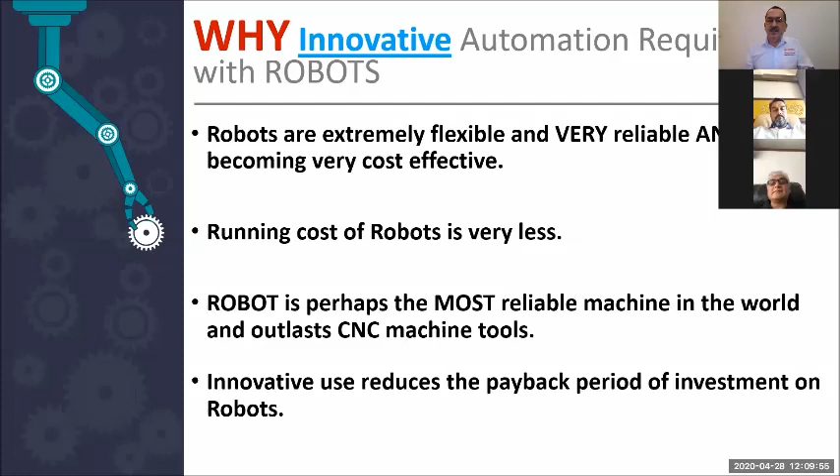The most important lesson, and what we are going to explain today, is that if you use robots innovatively, the payback period is very, very small. That is going to be the focus here. We are not going to talk about robots as such because I'm not an expert in robots - I am an expert in the innovative use of robots, so that the benefits are tremendous and you have a payback period for the project of less than 2 years, which is our goal.

Now, why are robots required for automation? Yesterday we had a very popular webinar where we had more than 400 unique participants, and we explained automation without robots. So why do we need robots?

First of all, non-robotic automation, which is reliable and not jugaad, is only possible for small jobs which through gravity or vibrations can enter the enclosure of the machine, where grippers mounted on the slide of the machine are able to load and unload. So this is the scope. You must have small round parts, hex parts, or small shafts. That is the limitation.

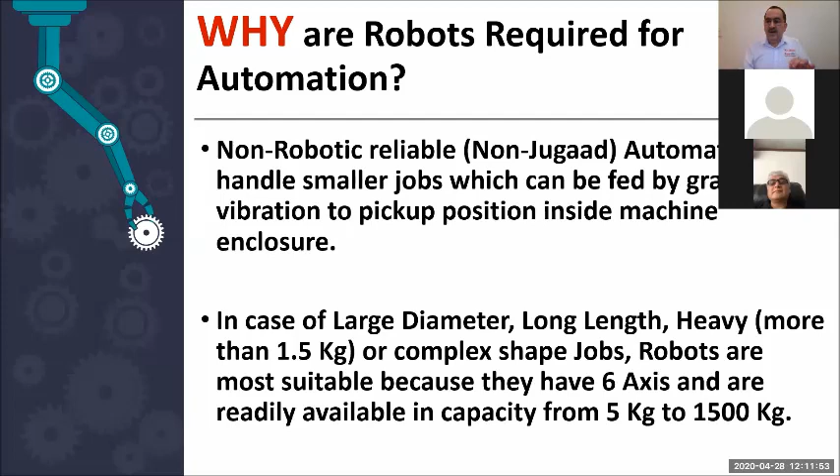Now if your job diameter is beyond a certain point, for example we have supplied automated cells with robots for jobs up to 600 dia, up to 90 kg weight, for flywheels, for very long shafts, for odd shaped jobs. When you have these kinds of challenges, the robot is the best option because it is very agile. It has 6 axes, so you can move it in a very innovative manner, and it is available off the shelf from capacities as low as 5 kg to 1500 kg. There are even bigger robots, but from 5 kilo to 1500 kilo you can cover almost every job you can think of. So this is why robots are necessary.

Now, the core theme of this webinar: how are robots used innovatively? How do we recommend the use of robots in an innovative manner?

There are 4 ways. The first innovation is called placement or positioning, that you can place the robot in a very innovative manner so that it can do a lot of things and give high value. The second innovation is extending the range of the robot by using a 7th axis, which is a track at the bottom on which the robot moves.

Please note that when you see the specifications of any robot, there are two things: one is called payload, and the other is called range. So for example, if payload is 12 kg, for a 12 kg standard robot of a standard make, let's say Fanuc, you will have a certain range, for example 1300 mm. Now this becomes a limitation, that within this circle only the robot can load, unload, or do any value addition.

But when you add a track to it, either it can be a ground mounted track or a pillar mounted vertical track with the robot hanging upside down, you extend the range of the robot so it can move far and wide. That's the second innovation, which we'll talk about and show today.

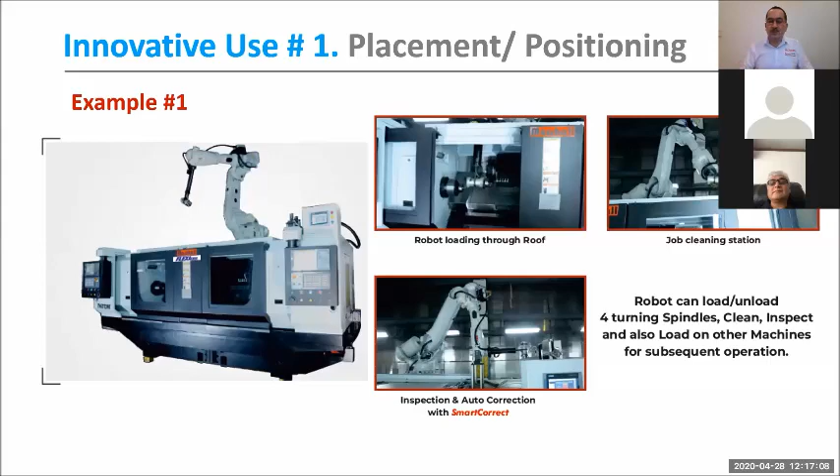So here's the video.

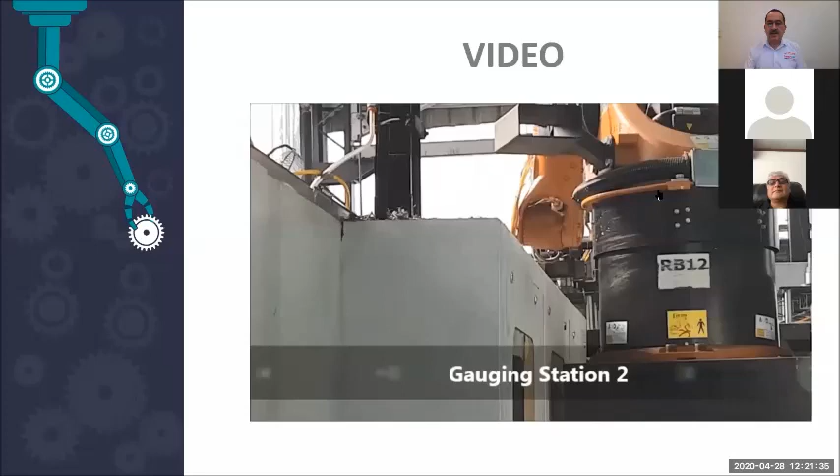As you can see, the robot is taking care of 4 spindles, loading and unloading through the roof. The actual speed is more, this has been reduced so that things are very clear to you. 3 gauging stations are on the roof, and the raw material comes up through an inclined in-feed system, as you can see right in front here. This is from where the raw material is picked up. So this was another example of innovative use of robots through placement or positioning of the robot.

Now, this third example is where we have done a lot of things with the robot, the machine, and other equipment. If you see on the left side, this orange colored thing is a laser marking station. The customer had a mandatory requirement of traceability from his foreign buyer, so each part after measurement had to be laser marked. On the right hand side, you see this machine, a very beautiful measuring system from Renishaw called Equator. This is used where a lot of things need to be measured, which a gauging station cannot do.

This is an option in certain cases. Now what we've done here is, because 2 spindles were producing the part, operation 10 and 20, and the customer also wanted a clean layout with minimum, no cage and all that, so we mounted the robot on the front of the machine using a track. The track enables the robot to cover a long, big area.

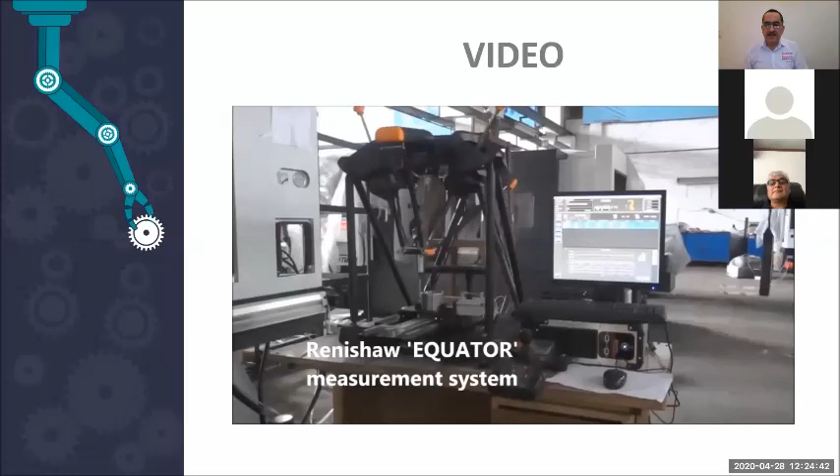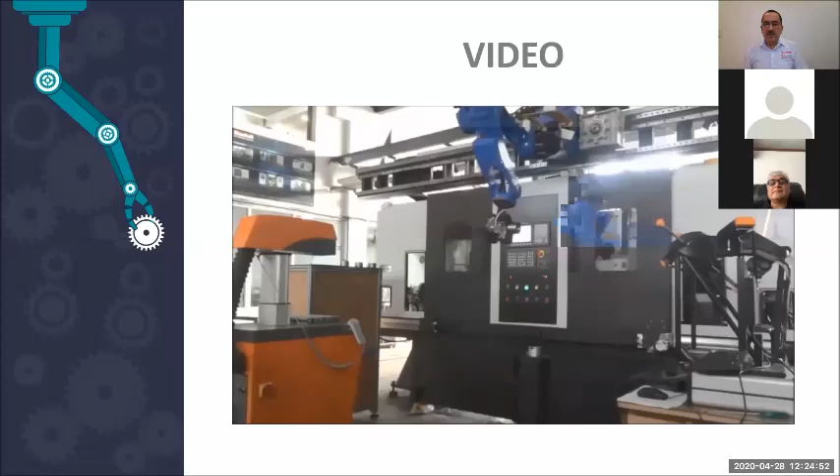So after measurement is done, a robot takes the job to the laser marking station, and within 2 seconds the job is marked, and then it is put on the outfeed conveyor. So again, this is an example of innovative use of a robot with the help of placement.

Now, before I go to the next innovation, which is using a 7th axis or a track, I would like to ask Mr. Paras Doshi. Mr. Doshi, I'm trying to unmute him. Mr. Doshi, will you unmute yourself? Yeah, I'm just doing that.

Mr. Doshi, you have been one of the early adopters of robot-based automation. I remember you gave us the first 2 orders for 2 lines in early part of 2013, and now it has been 7 years. So my question to you specifically is, has your confidence now with the evolution of technology and the addition of new things in robot-based automation increased in these 7 years?

Oh, very much. It is necessary today. Today, that is the correct way to go forward. And the way you've been explaining it in this webinar is very, very clear, very good. The robot is very flexible, and you have to use the robot for as many things as possible because you can do it. The idea of using the robot is not just to do operation 10 and operation 20 on a CNC machine, but to do various operations for which you require operators. So you have explained it very well that a robot can do many things, it can place, and it can work exactly the way you have programmed it.

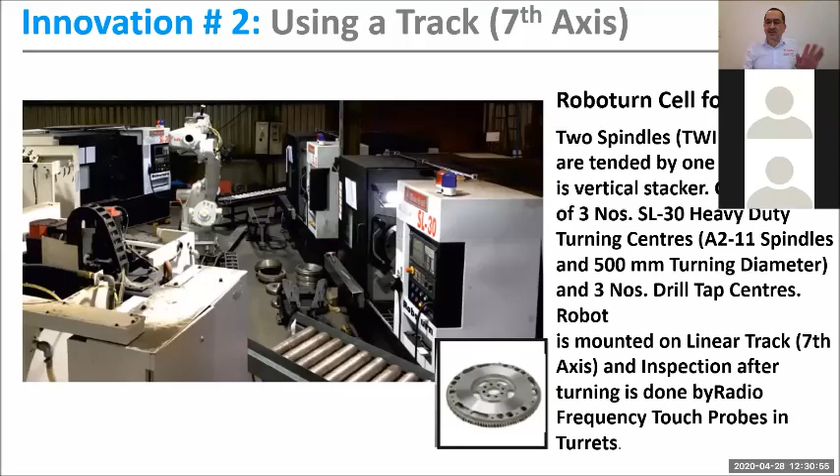This video, friends, is not very good because it was shot with a handheld phone on site, but I still want to show it to you so that you have an idea how this cell is working.

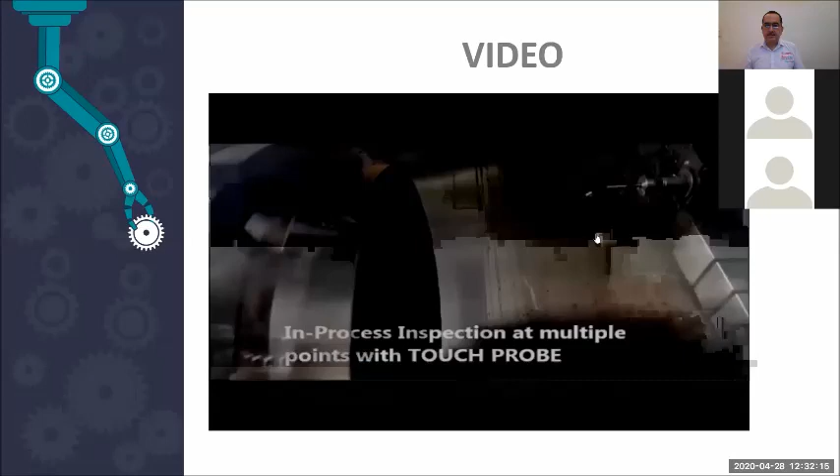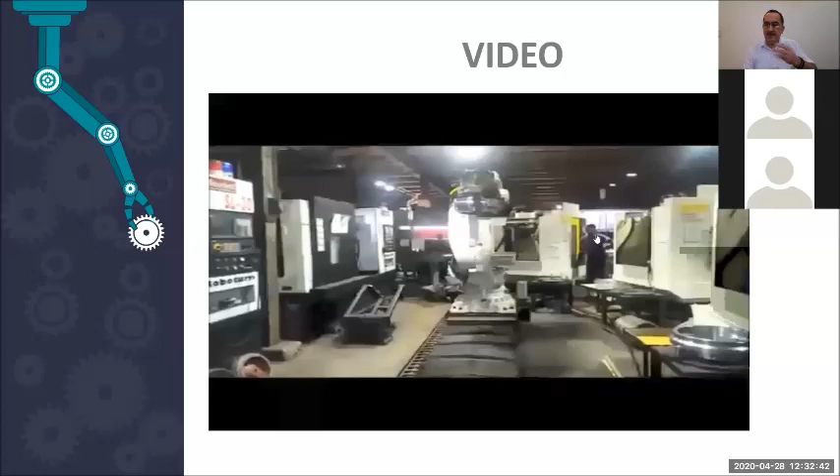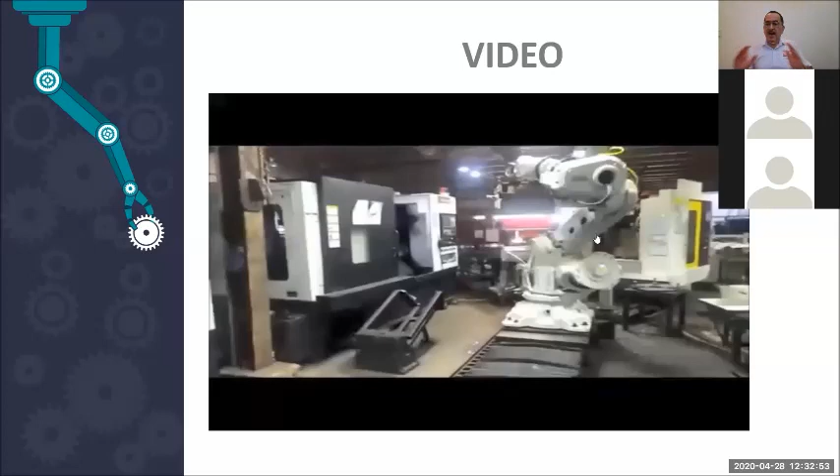Here, the robot is now taking it to the VMCs. There are 2 VMCs which do operation 30, which is the drilling on one side, drilling and tapping. And then there is one VMC which does operation 40, which is the other side. So basically the whole line has been balanced in such a manner that there is no wastage of time - 6 machines covering a large area are tended by 1 robot.

Sorry once again for this video - it's shaky, but I still wanted to show it so that the concept of how so many machines can be taken care of by the robot is clear.

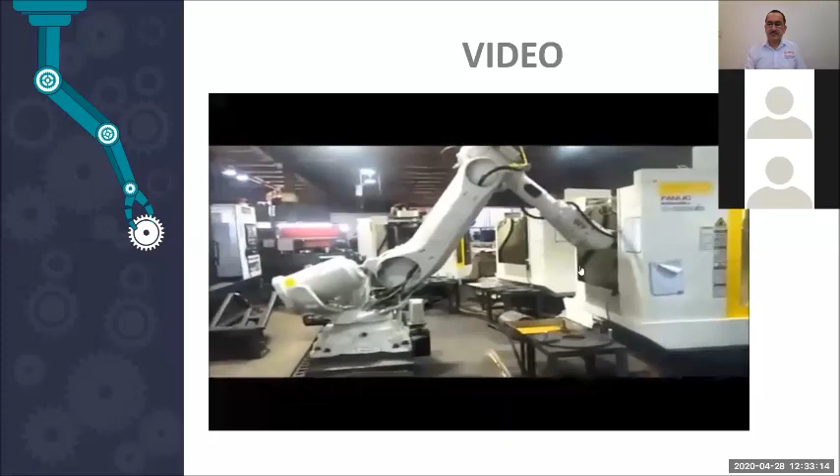So this was the first example of using a 7th axis to extend the functionality of the robot, by extending its reach so that it takes care of more machines.

Now we'll show you another example where there is a component called spindle. It's a forged component. In this cell, there is a centering facing machine, then there are two machines for the OD turning operation and two machines for the boring operation. And there are two smart correct gauging stations also - one for the OD, one for the bore.

So basically, the robot is tending to six spindles - two facing centering, two turning, two boring - and two gauging stations. Just imagine how much work this robot is doing, thanks to the fact that it has a track and a very fast rapid, as you will see in the video now - more than 80 meters per minute, so it's able to move here and there very fast and save time.

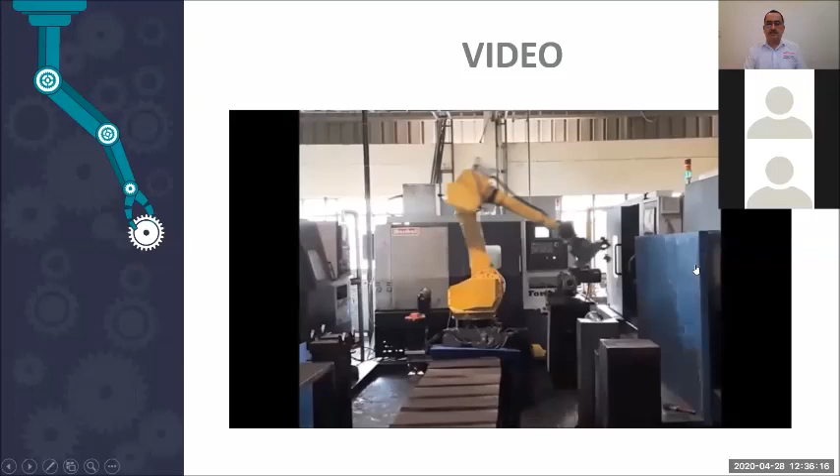So this is an example of a very innovative use of a robot on a track, taking care of six spindles and two gauging stations.

Here, I'd like to request Paragji to also share some views, because he is also making heavy forged components, and we have been discussing - we have already done some projects for him and we are discussing more. I would like to ask him to express his views on how he plans to deploy more robots, and what his views are about automation with robots.

Paragji: While I was seeing the presentation, I saw a few questions, like what are the possibilities of the robot - whether it can operate 4 machines and a gauging station - a lot of other questions. Frankly, I think there is no limitation as far as what the robot can operate. It is the same concept as the man-machine chart that we have - when the robot is operating, it is the robot-machine chart. So if your robot is staying idle, like what we did - we started at our end with just 2 spindles and a robot, then we realized that the robot was idle.

Then we added one more machine and a gauging station, and maybe a cleaning station. And I think the robot was able to operate at least 5 different stations with the same setup.

So now we come to the third innovative use of a robot. This third use is that we use it for multiple operations, which earlier maybe we thought could be done in very few places. But as we will show here, we can do so many things like deburring. If you are doing deburring of any object through a person, it is much more difficult because he cannot repeat those movements every time while that high-speed tool is removing the burr. But with the robot, once you teach it, it becomes so easy.

Every time it will do the same thing - a million times it can repeat the same thing, with no tiredness. So this is very important - once you teach it any task, whether cleaning, dunking the job into some liquid to remove chips, or putting it in front of an air blast to dry and clean it, it will keep doing it again and again. You just have to spend some time refining that cycle when you teach it, as you will see here in this cell.

Here, what we did was at an exhibition, IMTEX 2015, we showed that one robot is taking care of two turning spindles, a VMC, and also deburring, cleaning, air blast, and inspection with a laser. So we showed all this, and the VMC here is a dummy - we just fabricated something and put a fixture just to show the concept that we can have a VMC here. So please see this video.

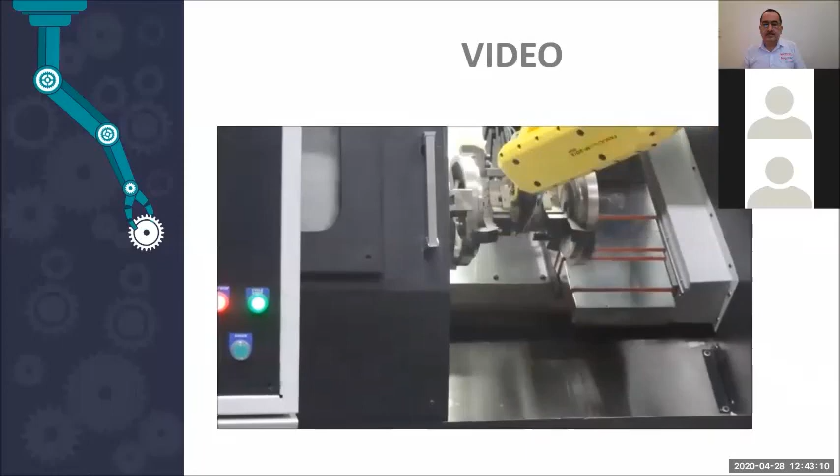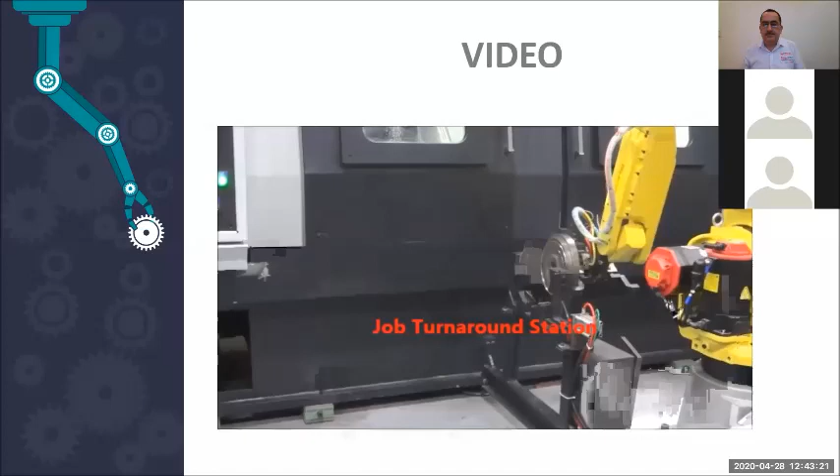This job is also flywheel, a smaller sized flywheel. The turning is completed in two spindles, and then this will take it to a VMC.

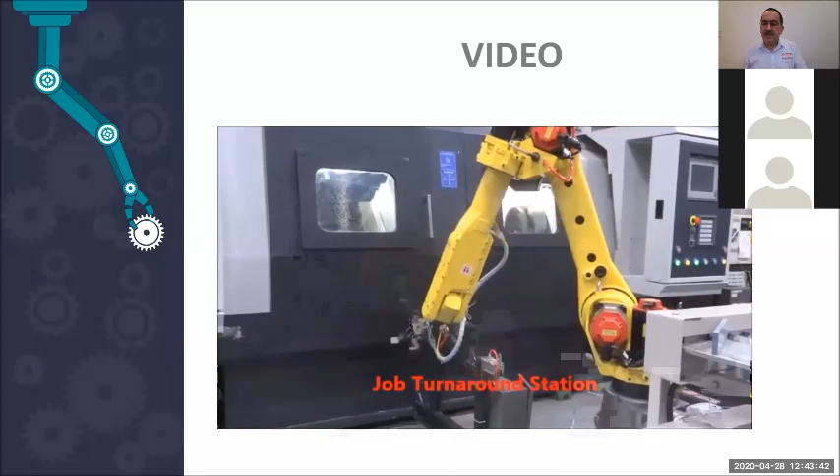This is a demo VMC where we have shown a fixture, a hydraulic fixture for clamping.

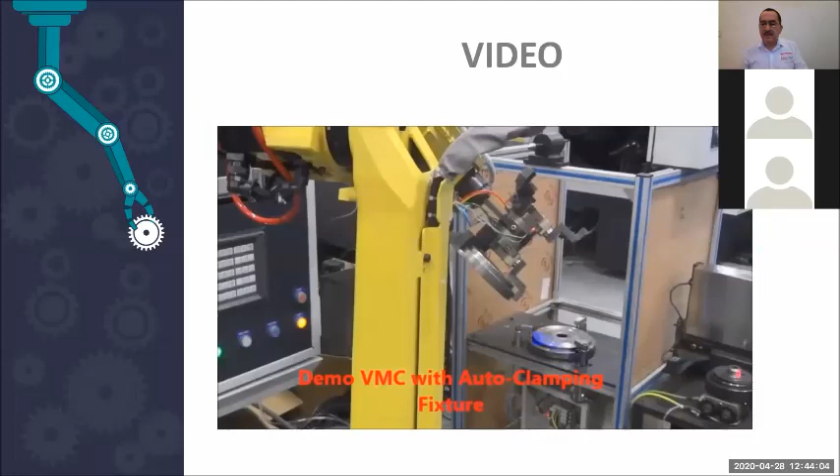After this, it is going to do the deburring. This is the deburring station. As you can see, it is trying to remove the burr on the outer edge with the rotating deburring tool.

After this is an air cleaning station. There's an air blast, rotating air blast, so it cleans the surface.

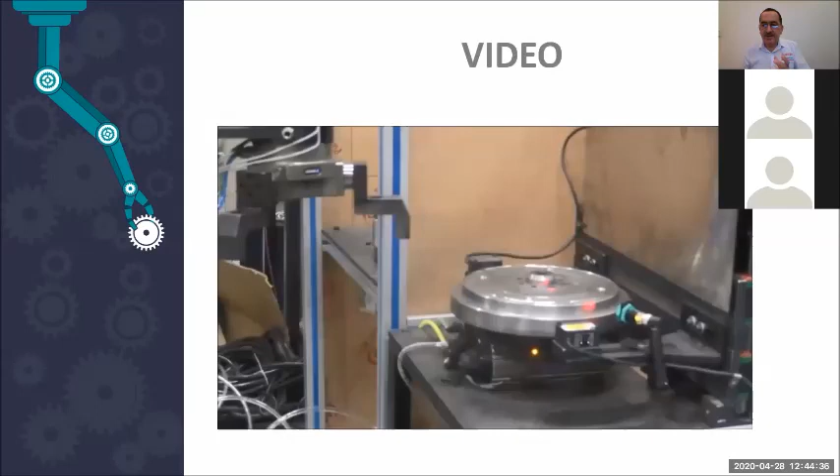Then this is put on a measuring station, which is measuring with a laser the diameter and the ovality at 2 different diameters. So this is a non-contact smart correct gauging station.

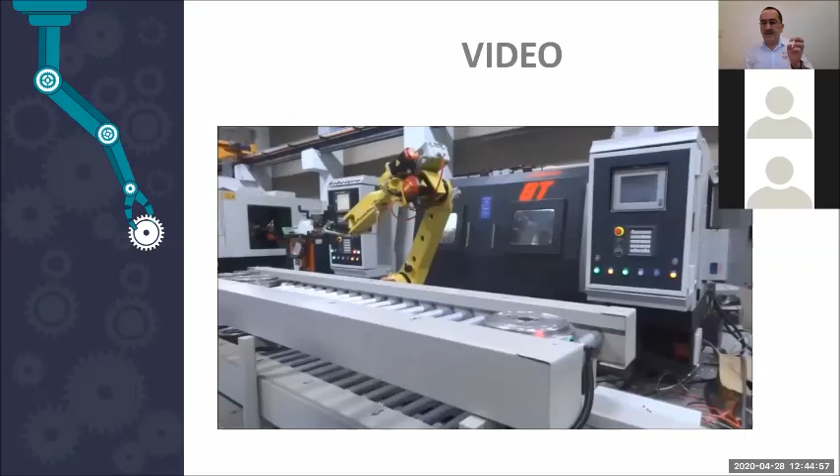And then finished job is put on an outfeed conveyor. So this is a complete manufacturing cycle and inspection cycle of a job with one robot. This is an example of innovative use of robot. Now I will show you some examples of different lines or cells.

And then we will come to the last part, which is the flexibility, flexible robots.

One operation has more cycle time, so we use one robot to take care of 4 spindles. There are 2 twin machines opposite each other, so 4 spindles taken care of by one robot.

And then it puts on a gauging station at the end of these 4 spindles, where it is inspected, and the spindle on which the part has been produced, if there is a requirement for correction, it is auto corrected.

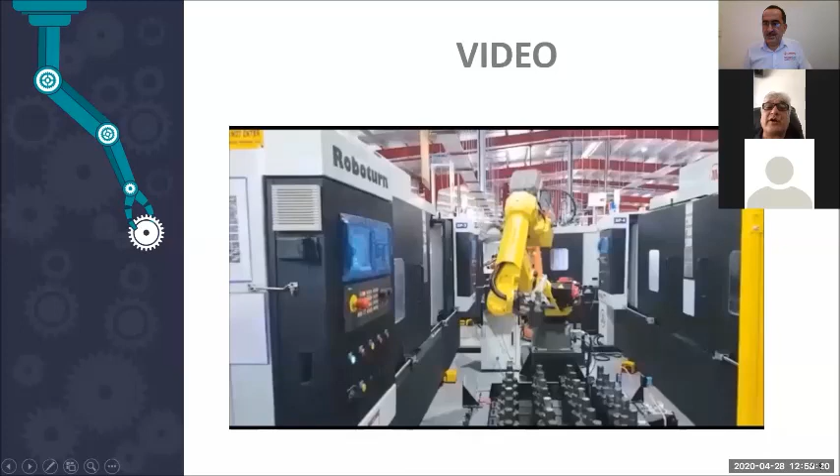When you have customers overseas and you have put up an automated line with a robot like this and auto gauging and all that, it increases their faith in you, the confidence that yes, we have a good supplier. You can expect yourself to be part of every project that they come with. They're extremely happy that you're doing auto gauging, auto recording, you have a CP, CPK coming, a run chart coming, live data that you can share with your customer if he wants. You can send him a summary report of the month. He's extremely happy and very confident that he's found the right supplier, and of course the automation also.

He knows that he will have no delivery issues because of humans. Yes, for sure, he knows that.

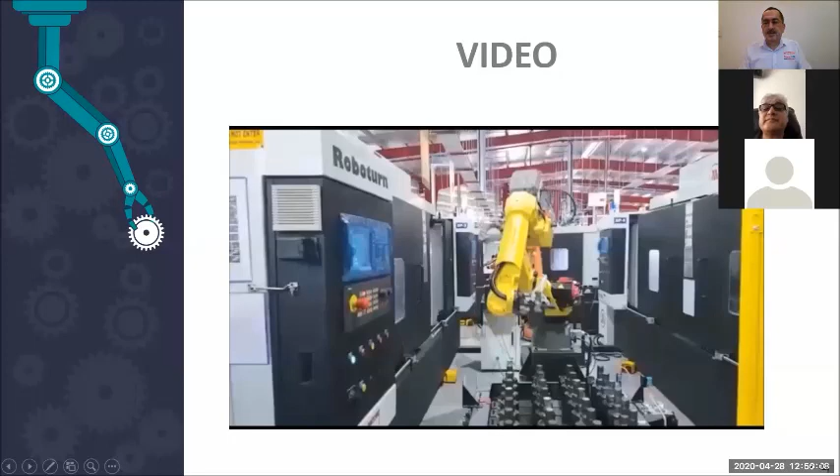Thank you, Paras bhai. A run rate study, today, for any project that you do, is the most important thing. Every customer of yours will come and verify and see that it is physically possible or not. And when they see that a robot is doing the work, they know that the run rate study we have submitted is going to happen. Thank you, Paras bhai. Thank you.

So now we give you another example, trying to give viewers a wide spectrum of examples, various types of uses of robots, various types of innovation, and various types of components. Sometime back, we had a heavy flywheel up to 90 kg. Now we come to a very small ring, called the piston insert. This is an essential part of every diesel engine piston. Why is it essential? This is cast within the aluminum piston, this special cast iron ring, and the piston rings sit on grooves within this cast iron because of the high compression ratios.

So this is required. Now we got a challenge from the customer that we want a totally unmanned line, and they showed us the input, which was tubes of cast iron, special cast iron grade tubes. They said, you will give us this, and we should get finished, inspected rings.

So we designed a linear line in which the first two spindles were doing rough turning, boring and parting off. The tube is fed from one side through a bar feeder into the spindle, through feed in a twin machine from both sides, and it's being turned, OD rough turned, bored, and then parted off, and these rings are coming out.

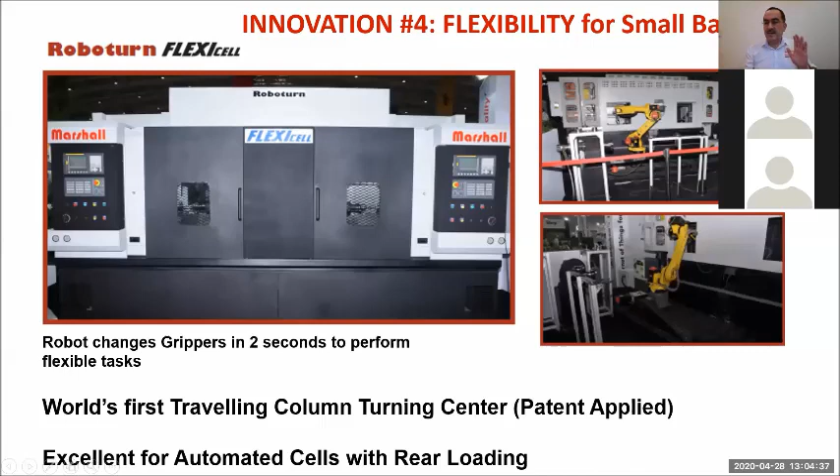This is a beautiful, flexible way in which one robot can work. Here, what we have shown is that we are loading a shaft using a 2-finger gripper. Then it detaches, and we have a 3-finger gripper which loads a gear blank on another machine. This is the limit of flexibility, that simultaneously you are loading two totally different jobs. So you can understand the level of flexibility. Please watch the video.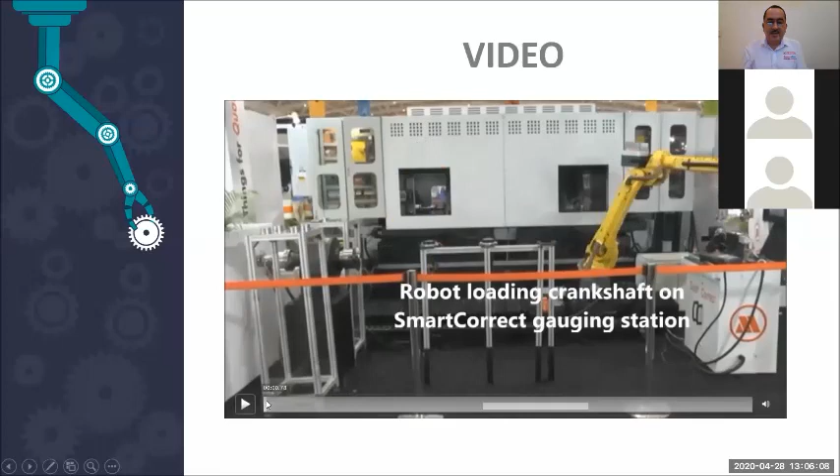Oh sorry, I was on mute, so I wasn't explaining. In fact, I would like to go back a little because this needs explaining. Sorry for that. So here we are showing the ultimate flexibility.

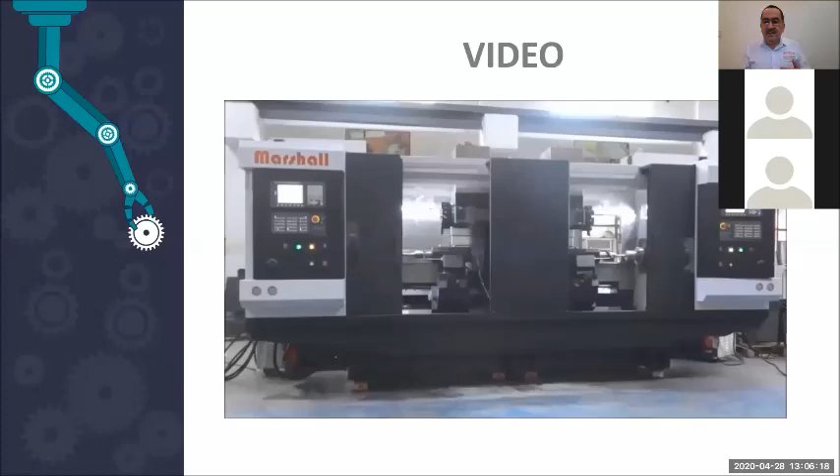Initially you will see that from the rear of the machine, the crankshaft is being loaded and unloaded. This is again a 2-wheeler crankshaft. So load unload happened. Again, the bed structure is moved to one side to allow loading and unloading. And then it comes to the inspection station. Part is inspected, and then it is placed outside.

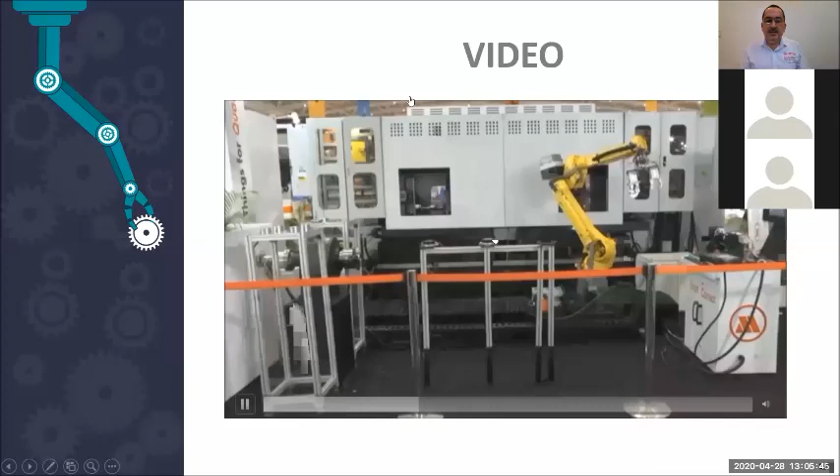Now you will see the real interesting thing happen. The robot will come to a station where it will detach its grippers and fit a new set of grippers within seconds. Now these new set of grippers are for a round job, for gear blank. So these are 3-finger grippers.

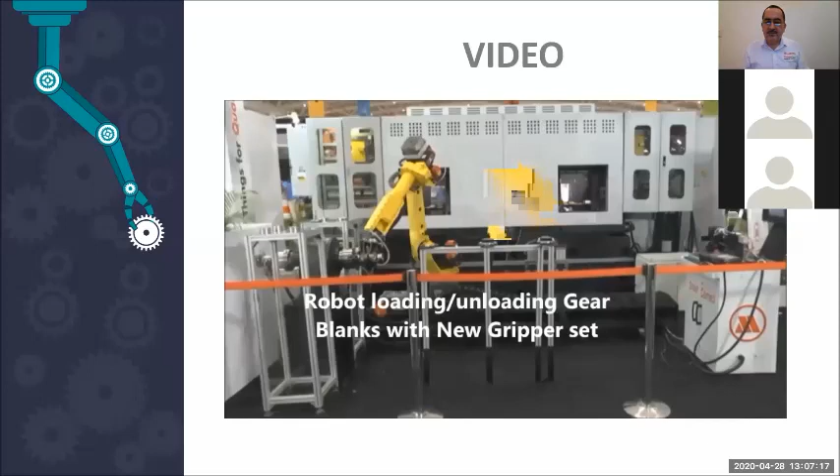So see the level of flexibility. In seconds you can change the gripper and do a totally different operation.

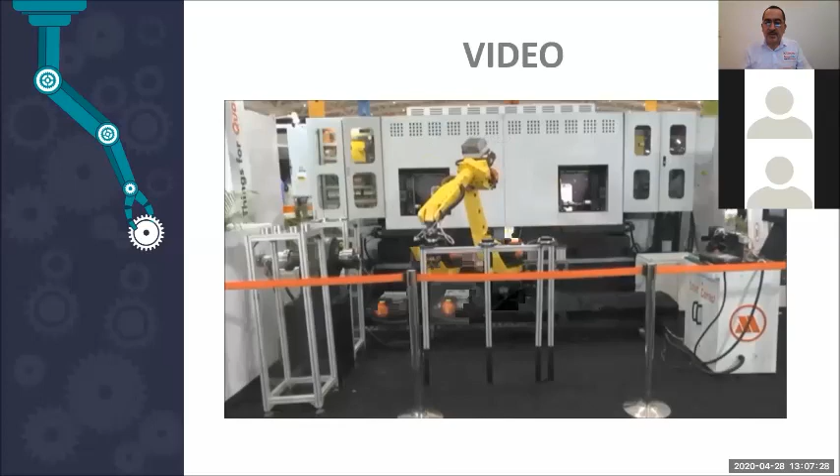And now you will see a third operation. After detaching this, there is a camera-based inspection system to see surface defects. So it attached this camera, and now it is inspecting the job with the help of an inspection camera.

So this is the level of flexibility which is possible through technology.

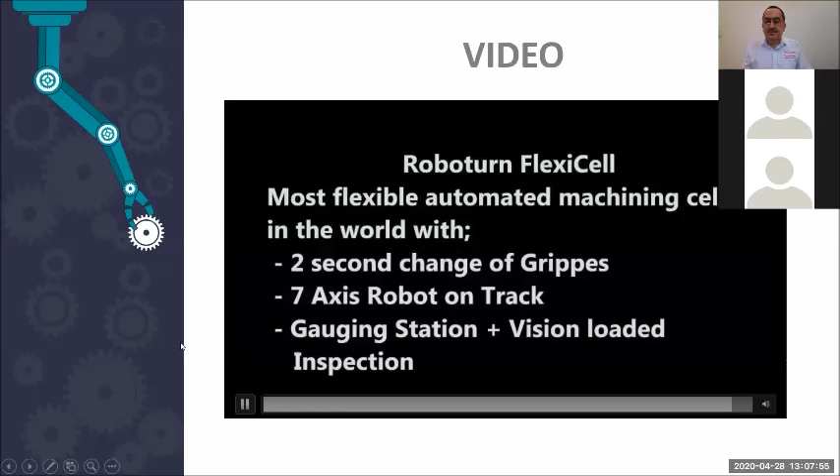I will now give you another example of flexibility, and let me explain, because when you watch the video, you may not be able to clearly understand what all flexibility is given here. This cell has been supplied to another esteemed customer of ours who was to be a panelist, but unfortunately he got registered as one of the attendees. He is Mr. Nair, a highly experienced entrepreneur based in Faridabad.

He machines gear blanks from forgings. So his challenge was that I have such a wide variety of jobs and small batches, because I'm making for 4-wheelers or whatever commercial vehicles. So my batch size is not very large. I cannot have 5,000 or 10,000 gears of one type.

Give me a cell such that I can do 10 variants of gears, and the variants vary a lot. It's not like very similar, it's completely different. Give 10 different kinds of jobs, I need to do 10 kinds of auto gauging, for every job, for every model, auto gauging.

So I need quick change work holding. I need quick change robo gripping. I need quick change auto gauging. So that 10 types of jobs can be done, with some jobs having a batch size of a few hundreds, not even thousands.

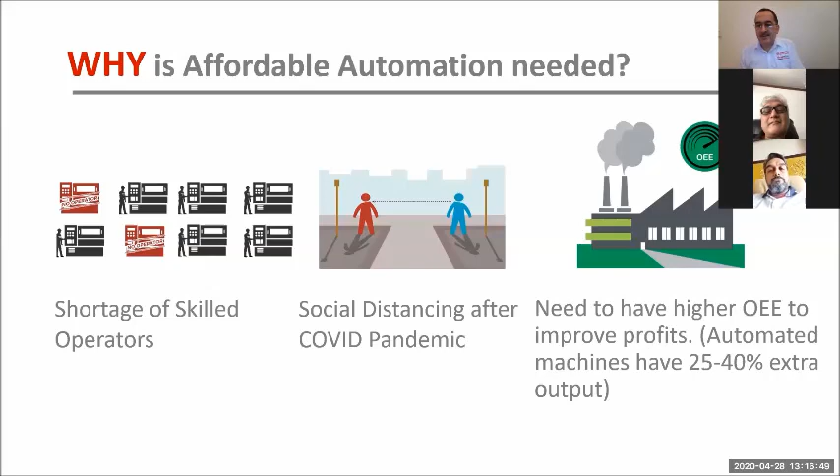Second thing everybody's talking about is now social distancing. So frankly, that is something that is required immediately, or else people will have to increase their floor space, which is impossible. So compared to increasing floor space, I think putting a robot would solve the social distancing problem much more easily.